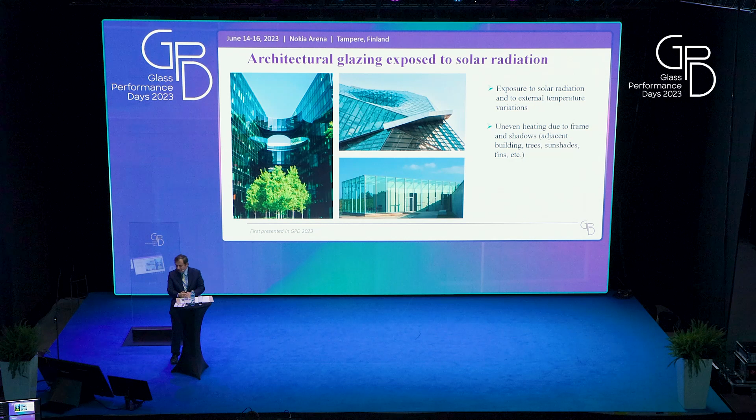So the problem is that of architectural glazing, which is exposed to solar radiation. What you can find is essentially that there may be an uneven distribution of temperature due to, for example, cast shadows, which are induced by neighboring buildings, by trees, by sunshades, by fins, and whatever. This is an important problem because the uneven temperature distribution in the glazing may produce thermal stress. My personal experience in Italy is that glass breakage due to thermal stress is one of the most important causes of failure.

And there have been a few problems, and the problem is that this is due to the uneven temperature distribution. It is not that the unique parameter is the temperature difference. For example, if you have a temperature which varies linearly in space, this satisfies the Saint-Venant compatibility conditions, so the thermal stress is zero, whatever the temperature difference. You have to take into account the distribution of temperature in order to find out the thermal stress.

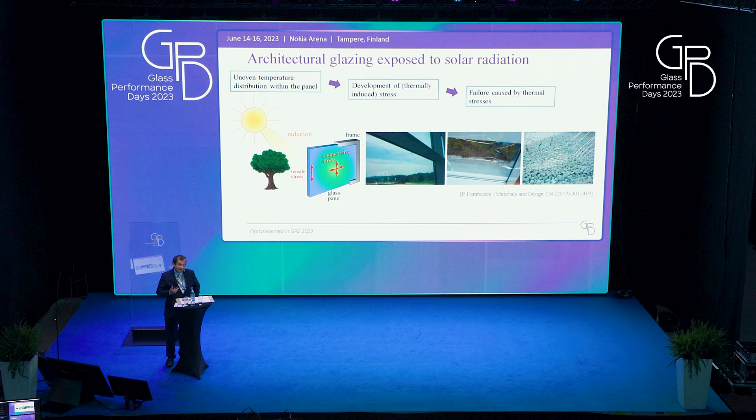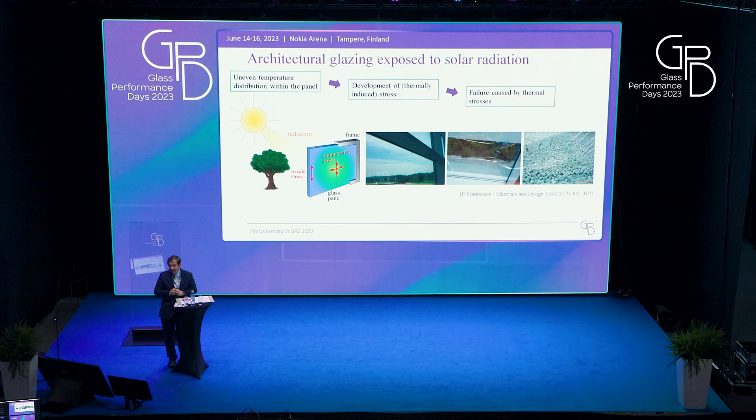And the key parameter is to assess the temperature distribution in space. With this distribution of temperature, some parts try to expand, some other parts try to contract, and this is the reason why you have the development of thermal stress. This is very different from a problem in which you want to assess the thermal performance in terms of insulation, because there you calculate the temperature distribution just to find out the thermal performance. Here, this is a thermoelastic problem.

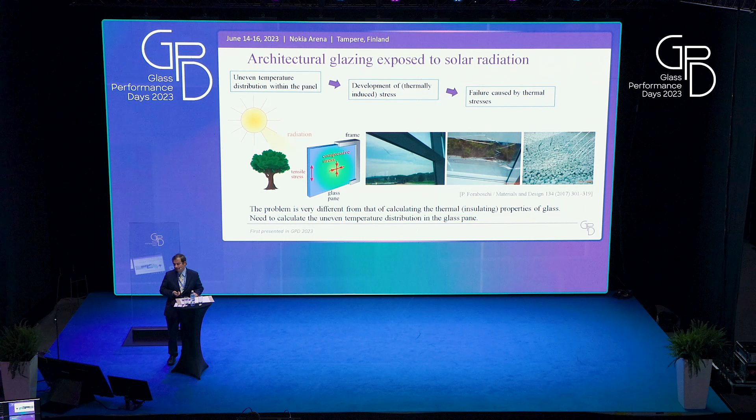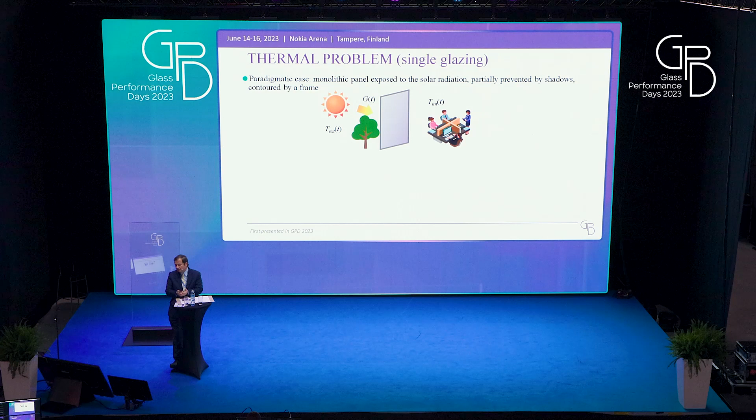So for the thermal problem, we have a paradigmatic case. I will discuss only monolithic glass. We have a pane which is exposed to solar radiation, partially irradiated, with a contouring frame. You can recognize basically four regions in a standard paradigmatic problem. You have region one, where the glass is directly invested by the solar radiation. You have region two, where you have shadows, and for example just a percentage of the solar energy hits that part.

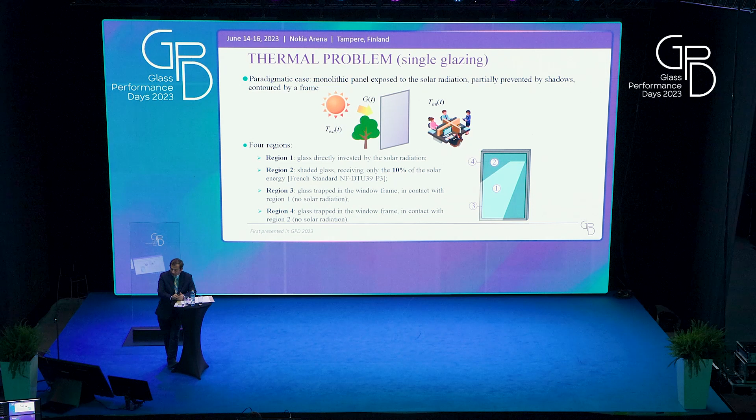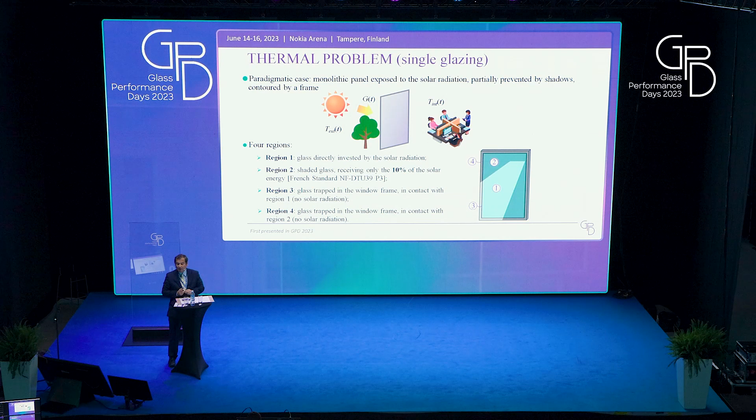According to a French standard, you can say that 10% of that invests the part. Then you have region 3, where the glass is trapped in the window frame, but region 3 is in contact with region 1. And region 4, which is still trapped in the window frame, but is in contact with region 2. And this, I think, is the minimum classification of the regions to obtain reasonable results.

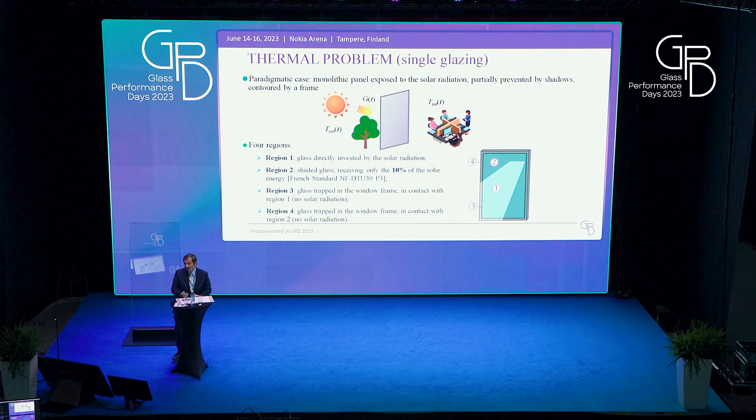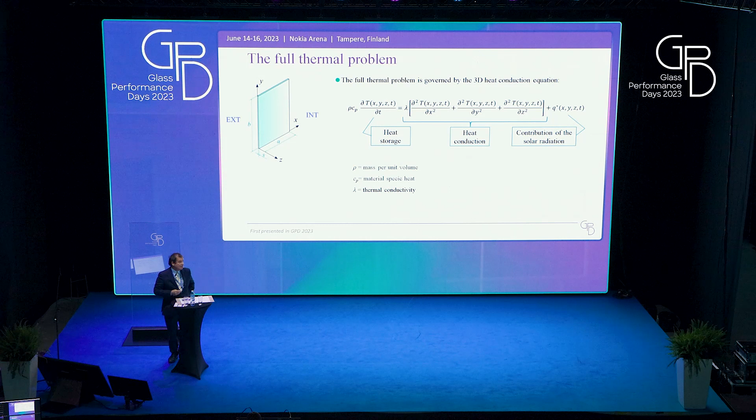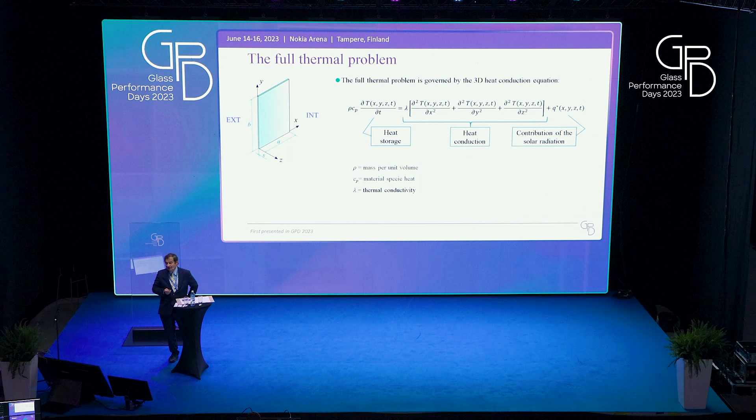Now, another thing is that the thermal problem is usually associated in differential form. It is usually associated to a differential equation of parabolic type, in which you have a second derivative in space. This may produce some problems because if you want to use finite differences, you have to approximate the second derivative. You can do that, but if you are interested in sharp temperature variation, and this is what you are interested in if you want to calculate the thermal stress, you may have some problems using finite differences.

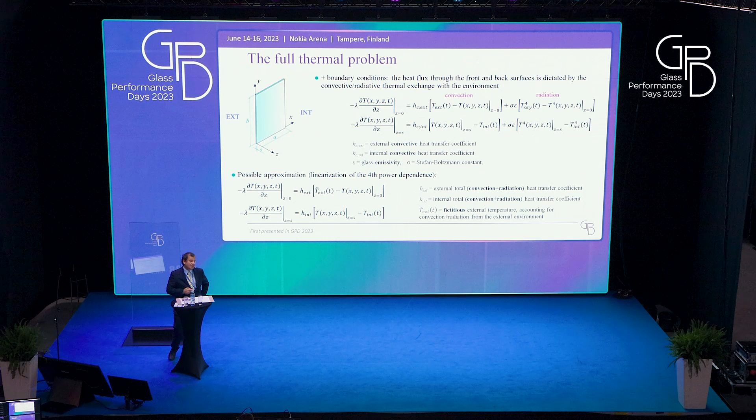Apart from that, you have to consider what are the boundary conditions at the various surfaces. You have a term which depends on convection and a term which depends on radiation. The term that depends on radiation is dictated by the fourth power of the temperature, but a thing that is usually done is to make a linearization of this boundary condition in a neighborhood of the average temperature, so that the boundary condition in terms of radiation can also be expressed as a linear difference between the various temperatures.

Now, the differential form of the heat conduction equation involves the calculation of derivatives, which are difficult to do. Especially if you have to calculate temperature gradients, it's not easy from a numerical point of view. There is a very ingenious approach which was proposed by Maurice Biot. Maurice Biot was a Belgian engineer.

Then he moved to the United States and did his graduate study at Caltech under the supervision of Theodore von Karman. He proposed a variational approach to the thermal conduction equation, in which the variable is not the temperature, but another field which we called the heat displacement field, referred to with the letter H.

You can see that the temperature is associated with a divergence of H. This means that the heat displacement field enjoys a much better regularity with respect to the temperature because, roughly speaking, it is the primitive function of the temperature. So you can consider a nice problem in which you may have a very strong temperature gradient in a variational form, but just introducing this kind of variable.

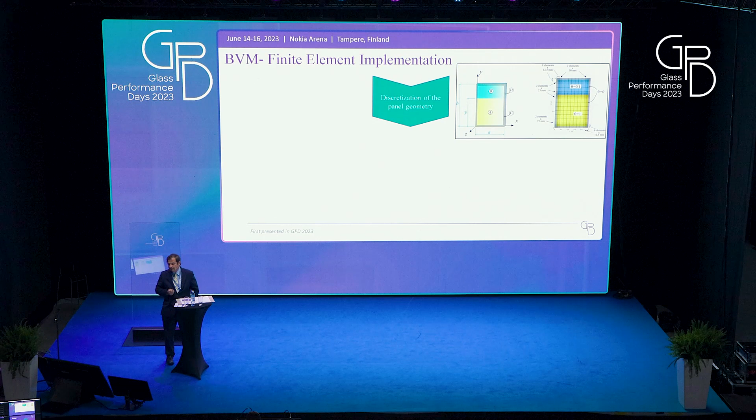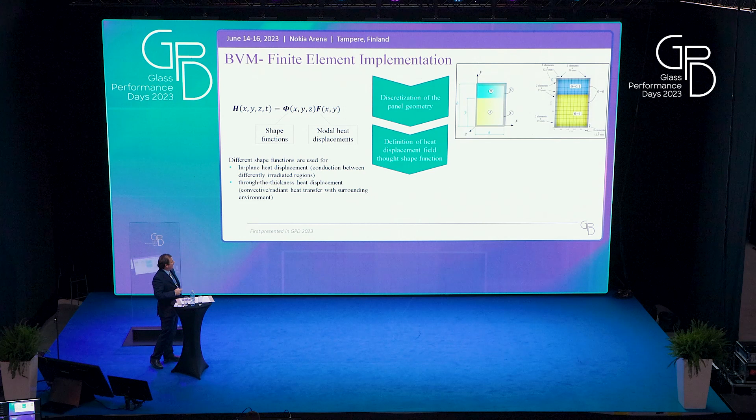Here I represent a few examples in which we consider shape functions for the heat displacement field, which of course can consider the three-dimensional problem, because if you make a one-dimensional problem, you are not doing anything if you are interested in assessing the thermal stress in your glass. So we have different shape functions for the in-plane variation of the heat displacement field and the out-of-plane variation, because the finite element allows you to select the most suitable shape functions for your numerical calculation.

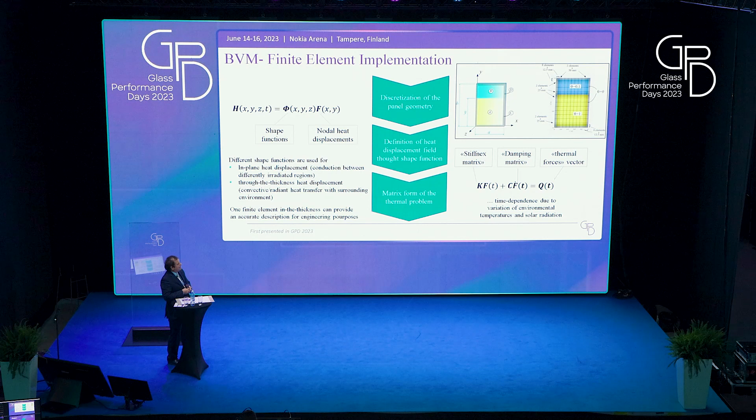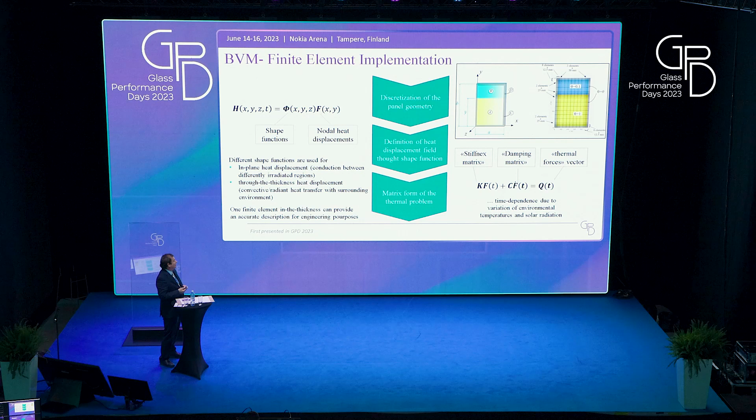What you end up with, for the discretized form of this equation, you can see on the right-hand side: it's the solution of a multi-degree of freedom oscillation in which the mass is equal to 0. So you have only the elastic term and the damping term, and this is, of course, because the governing equations are of the parabolic type, and not of a hyperbolic type.

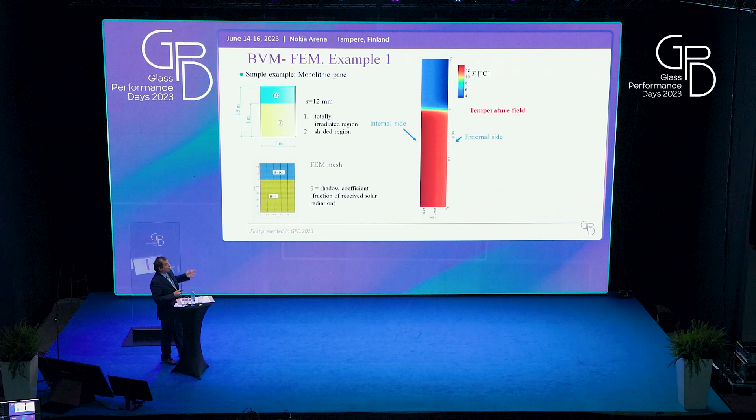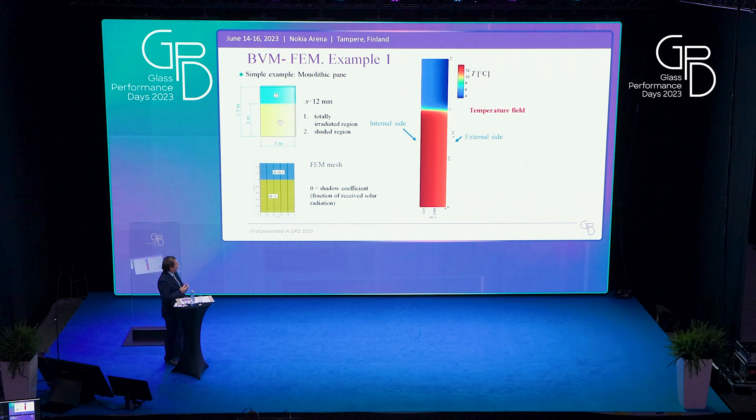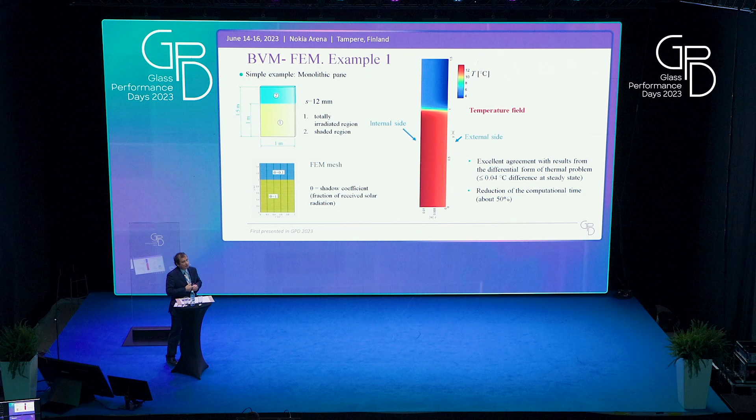This is just one example in which we consider a simple case with region 1 and region 2. The finite element mesh is represented at the bottom, and this is a 2D problem basically. We used it as a benchmark problem because it is 2D, so you can implement the differential form of the equation quite easily. We found excellent agreement with the results for the differential form of the problem, the standard one, with difference less than 0.04 degrees Celsius at the steady state. But the program is much more efficient from the point of view of computational time.

This is another important thing, because apart from doing a finite element implementation which takes into account the basic characteristics of a problem, you'd like to conceive an engineering approach for everyday calculation. An important thing is to consider the distribution of temperature.

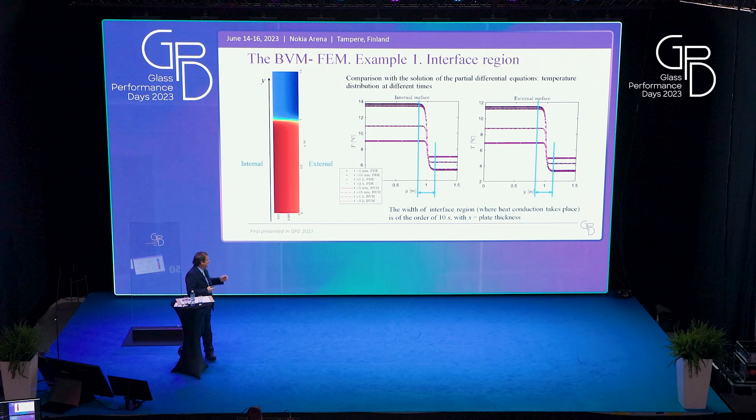Here you can find the distribution of temperature, the vertical axis in these two graphs, and in the abscissa you have the y direction. You can see that the temperature is mostly uniform in these regions, apart from the transition from the hot part to the cold part, and this transition zone is indicated by the steep descent. You can see that the width of this zone is approximately 10 times the thickness of a pane.

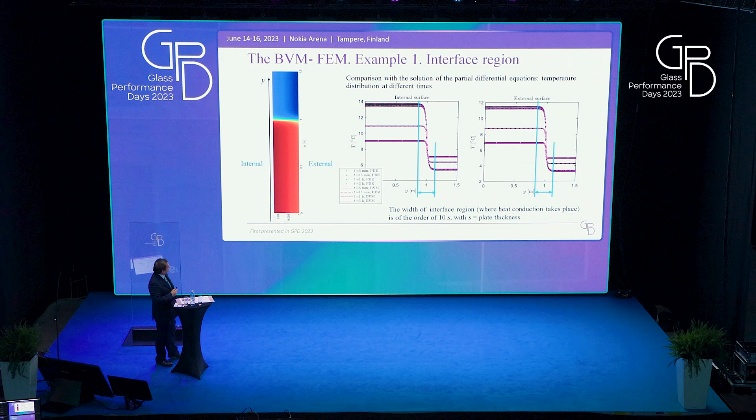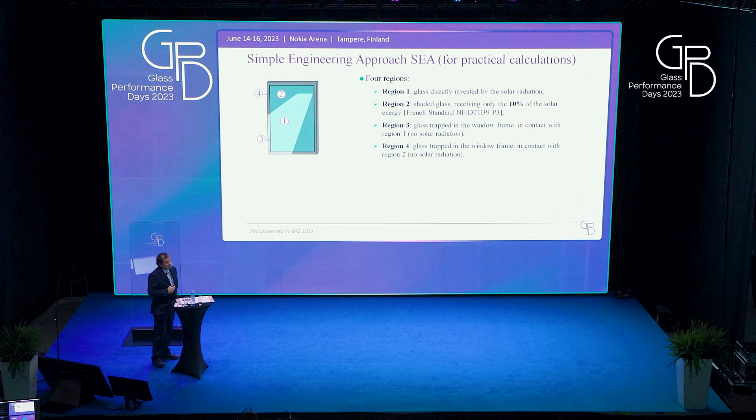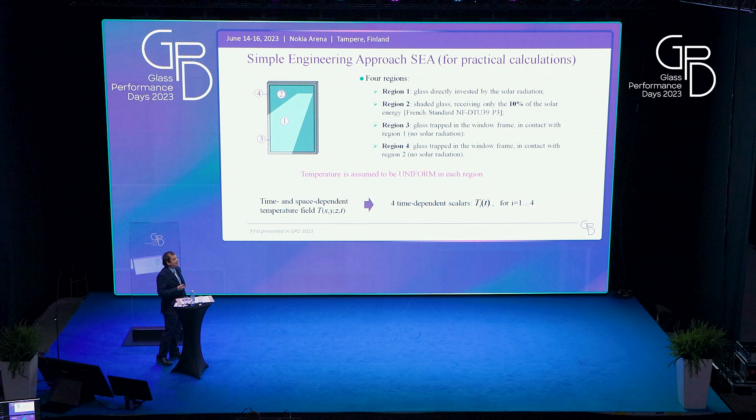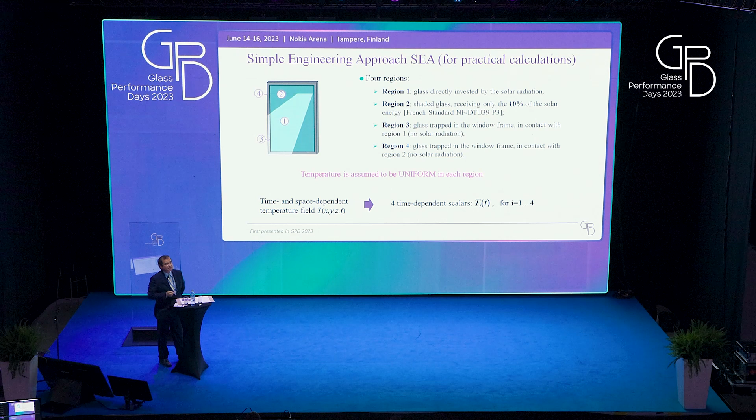This is a very important remark that can be used because the temperature is almost uniform in the region apart from the transition zone. So in a simplified engineering approach, we call it the SEA. In the SEA, we classify the four regions of the pane, and we suppose that the temperature is uniform in each region. So instead of solving a differential problem, you just have to solve an ordinary system of four equations, because the unknowns become only the temperatures in the four regions. So you have only four unknowns.

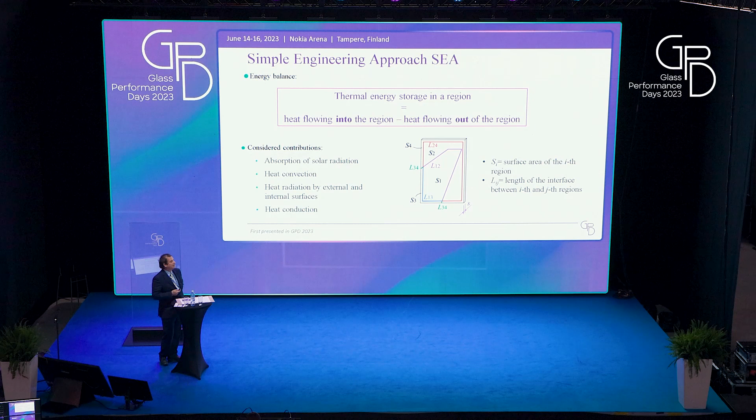The term heat conduction, which is most of the time neglected in current standards, is one of the most important terms if you want to have a good estimate of the temperature distribution. Neglecting heat conduction usually provides a very drastic overestimation of the temperatures in the various regions.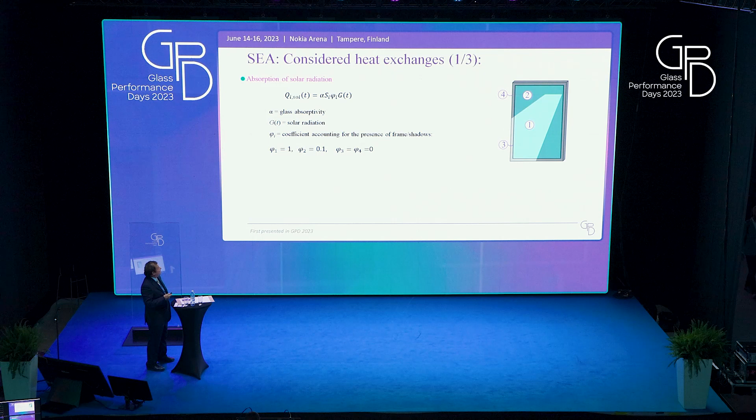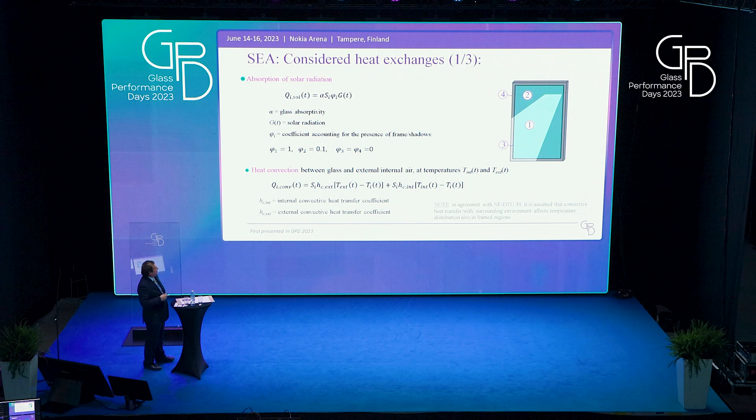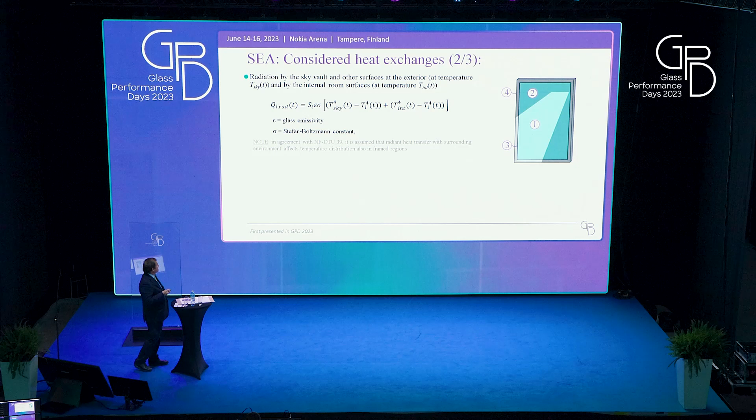So the various terms are analogous to the previous one. You have, of course, the absorption of solar radiation, in which you consider that, for example, regions 3 and 4 have no absorption because they are shielded by the frame. Region 2 receives, for example, 10% of the solar radiation. Region 1 receives 100%. Then you have heat convection between glass, the heat exchange due to air flowing inside and outside. Then you have the radiation from the sky vault and other surfaces, and then you have the other contributions.

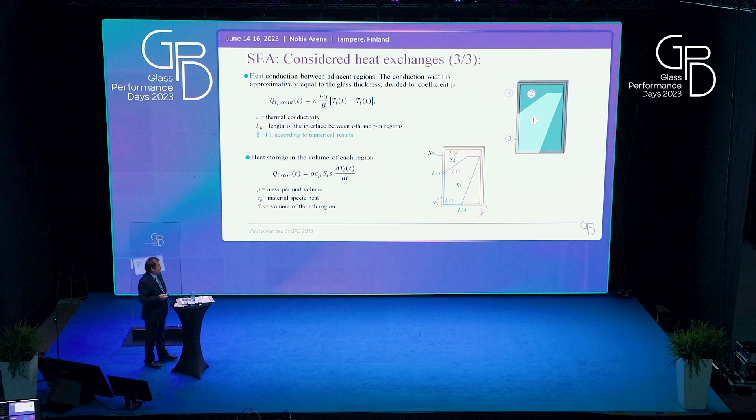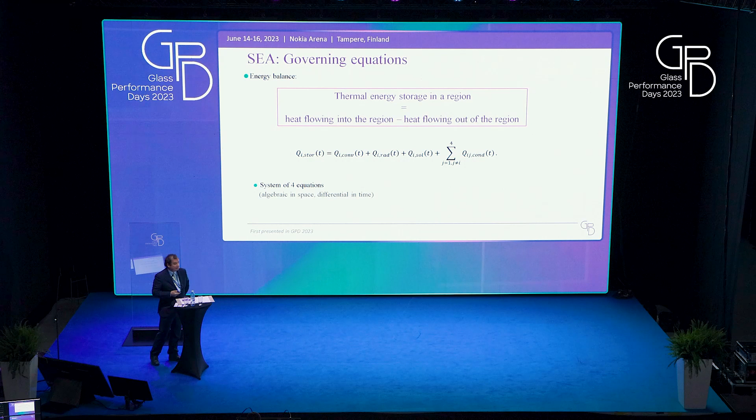And for what concerns heat conduction, you use the result from the previous numerical calculation, and you assume that the region in which heat conduction takes place is a thin strip. But you take into account that the thickness of the strip is about the thickness divided by this coefficient beta, found in these formulas, which you take equal to 10. And finally, you have the heat storage in the various regions. So what you find is a very simple governing equation: a system of 4 equations which is algebraic in space and differential in time. From these, you can determine the temperatures in the 4 regions.

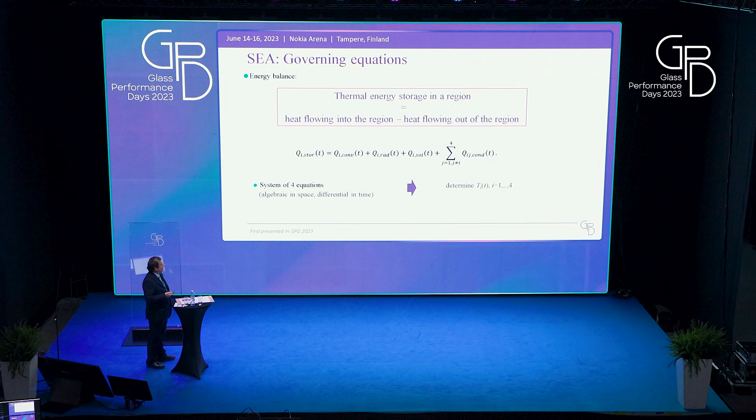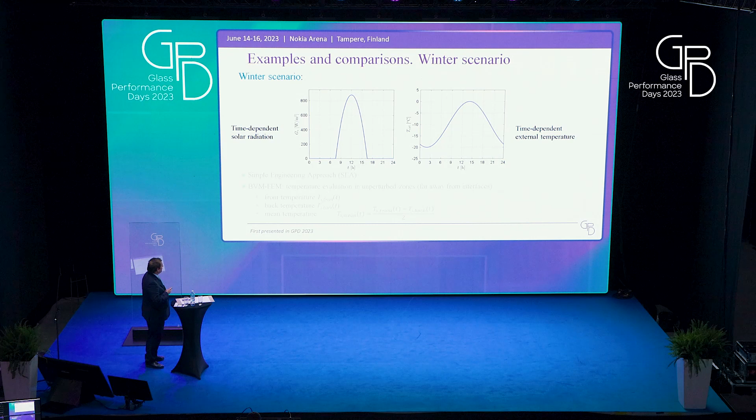So this is just an example. You have as input datum the solar radiation as a function of time, and also the time-dependent external temperature. You can calculate, for example, using the variational, finite element method approach called BVM FEM—Biot Variational Method, Finite Element Method—what is the temperature on the inner surface, the front surface, the back surface, and also the mean temperature. The mean temperature is the only one the SEA approach can calculate.

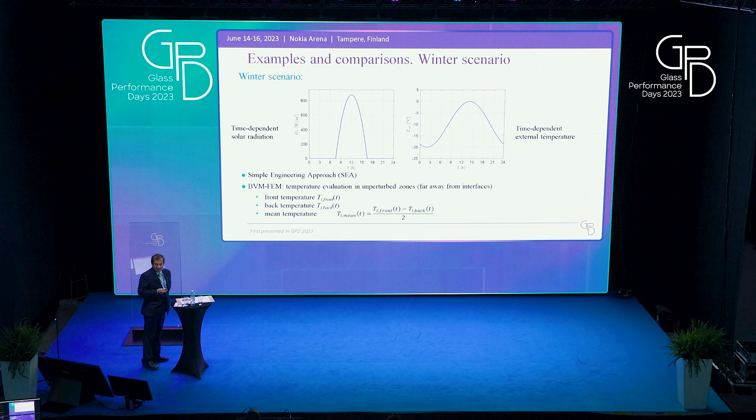And for this case, you can see what is the transient problem. Of course the SEA cannot provide a very complete scenario, but it is very good for finding out the average temperature in the thickness, because despite its simplicity, you can find the average temperature in the thickness for the 2 regions with an error less than 0.5 degrees for region 1 and 0.3 degrees for region 2.

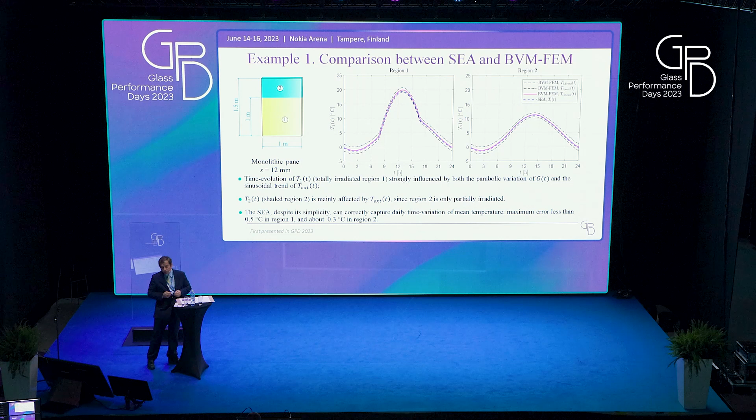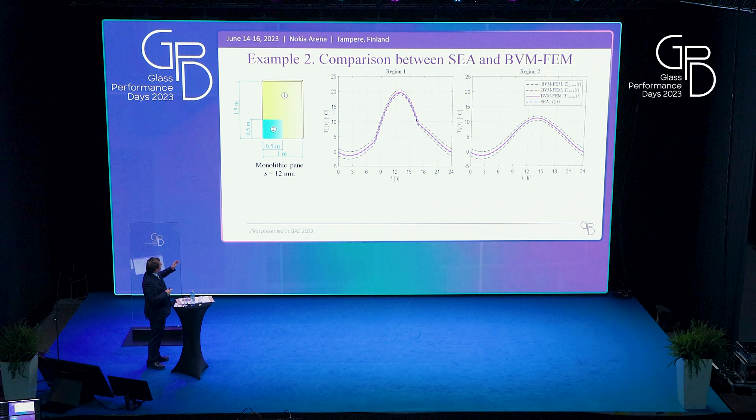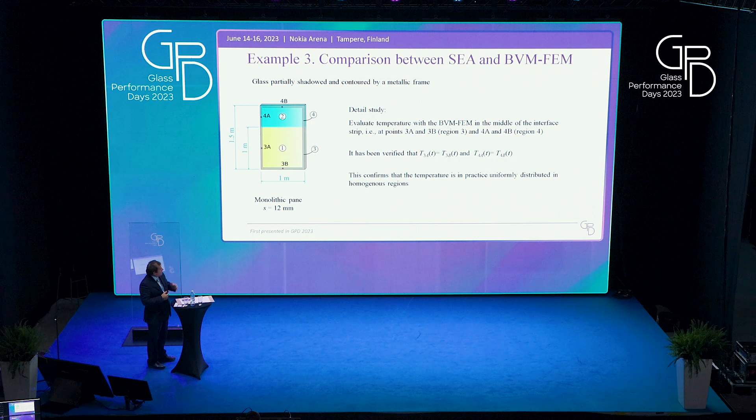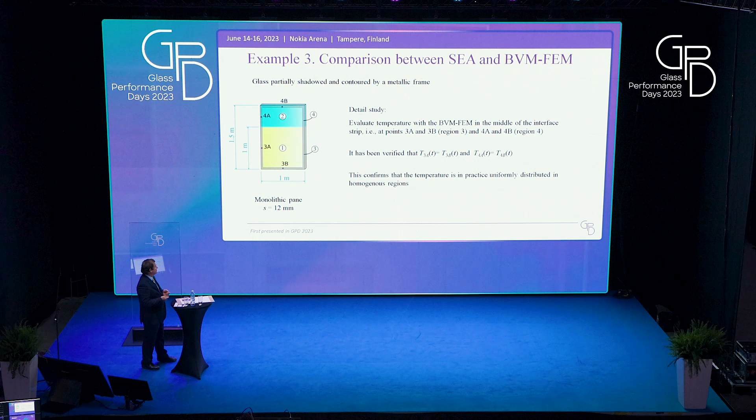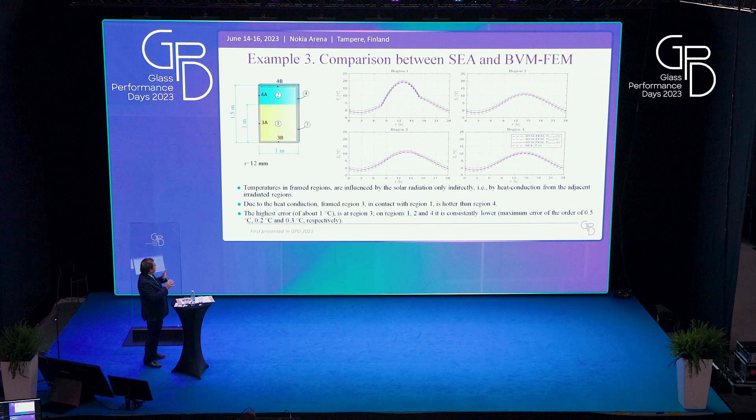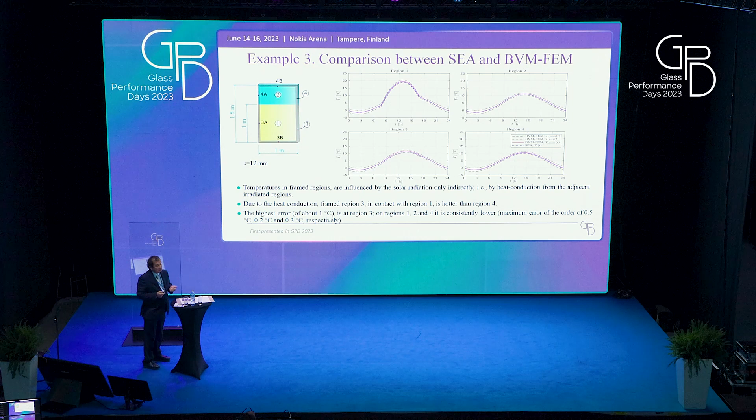This is a more difficult problem in which you have the other 2 regions, but also regions which are shielded in the frame. It's important to consider region 3 and region 4 if you have conduction, because region 3 is in contact with a hot region and region 4 is in contact with a cooler region. These are the results. Again you find very good agreement if you consider the temperature at a point in the middle of the various regions, with errors of the order of 0.5 degrees, 0.2 degrees, and 0.3 degrees for regions 1, 2, and 4. In any case, you can get a very nice approximation.

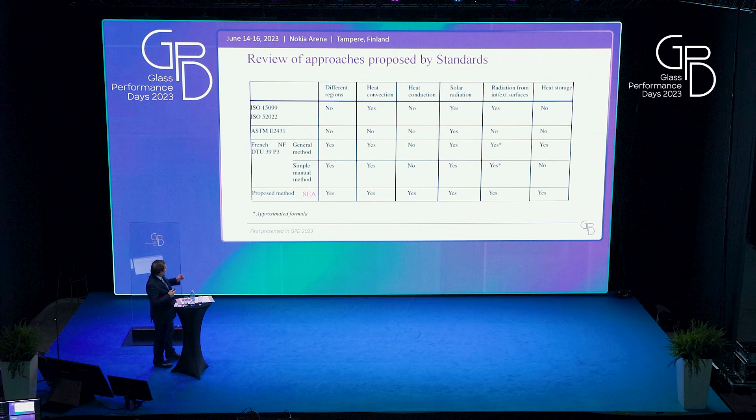The various standards take into account various forms. There is a little confusion because many standards give conflicting rules. But in general, what standards tend to neglect is conduction. If you want to produce a reasonable estimate of temperature, you have to consider heat conduction through the various regions. Otherwise you make an estimate which is too much on the safe side, and this may cause problems in the design. In the proposed method I just presented, we consider all heat exchange contributions.

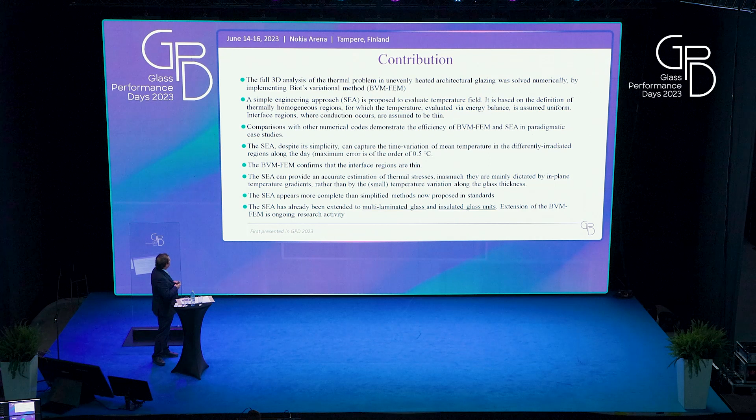So what we have done is present a finite element code specifically conceived to determine thermal stress. It relies on Biot's variational principle, and the code is very efficient. From the resulting paradigmatic cases, we proposed a simplified engineering approach in which the solution is that of a system of algebraic equations in space—much more simplified. It relies on the observation that conduction between the various parts takes place in thin strips. From this, we found that the temperature differences with the finite element calculation are very, very small, so the simplified model is efficient.

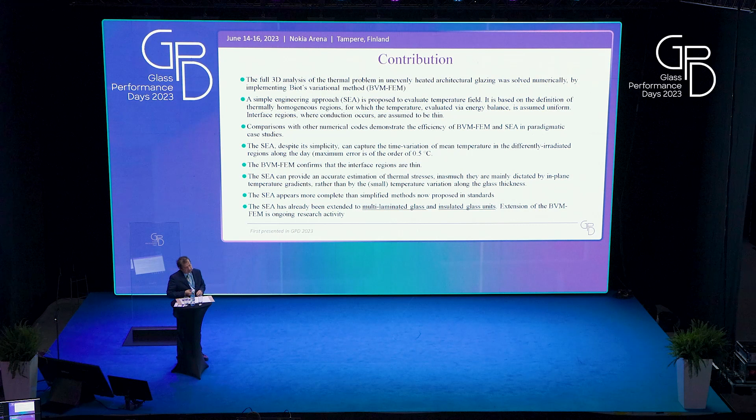And now the problem is how to make the safety verification of glass. In this case, you need to calculate the consequences of breakage, because you can accept, for example, a higher probability if the consequence of breakage is very mild. So some work is still needed to find a suitable verification formula.

But in any case, I finish with a joke: a broken glass is like a broken heart—it always brings sadness, but also live surprises. So thank you very much.